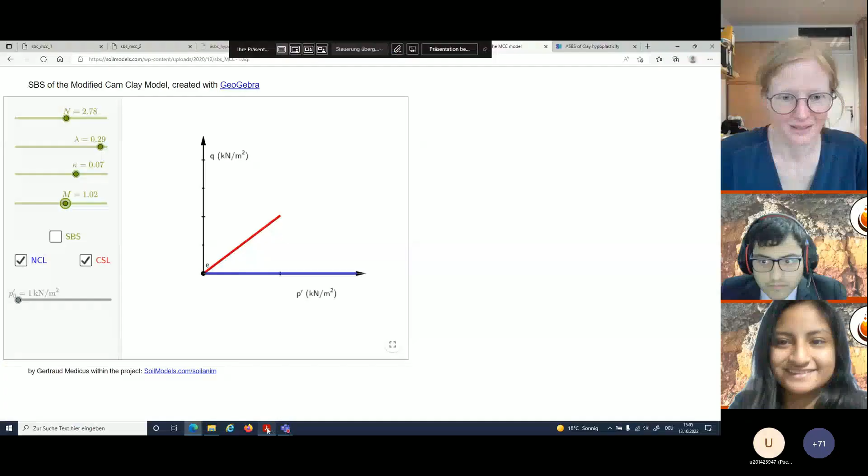Thank you very much for your introduction, and also thank you very much for your invitation. As I said before, it's my first time to be virtually in Peru. I've never been there in person, so it's very nice to start with this visit today.

I will now talk about how visualizations and animations can help to understand soil constitutive modeling. In doing that, I will present a project called Animating Soil Models, which includes a lot of visualizations. Before I start showing the visualizations, I will give a short introduction to the topic.

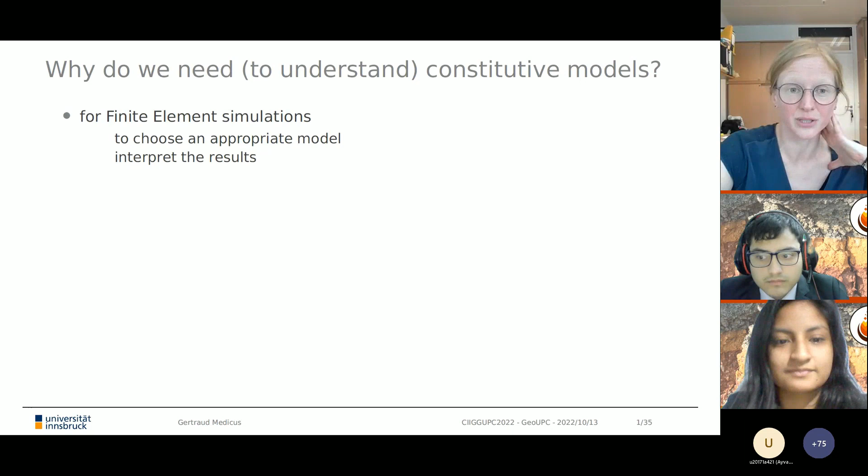Why do we need constitutive models, and why do we need to understand them? Everyone needs a constitutive model if the person carries out a finite element simulation, and we have to choose an appropriate model. We also have to interpret the results, and therefore we have to understand the constitutive model.

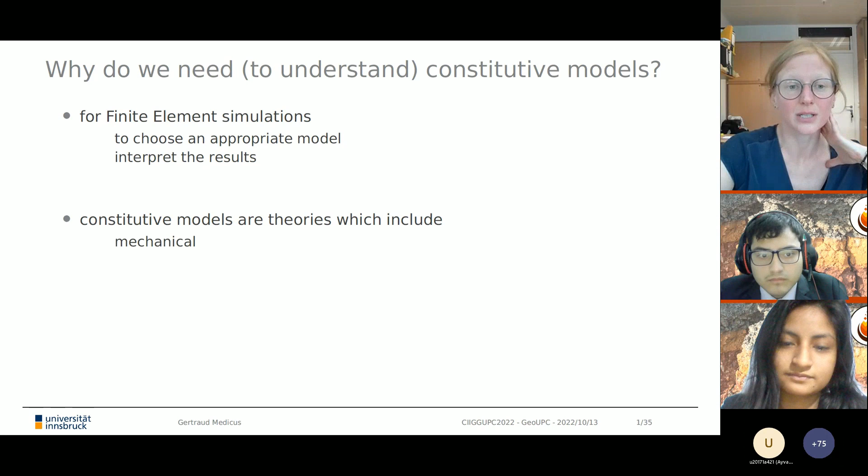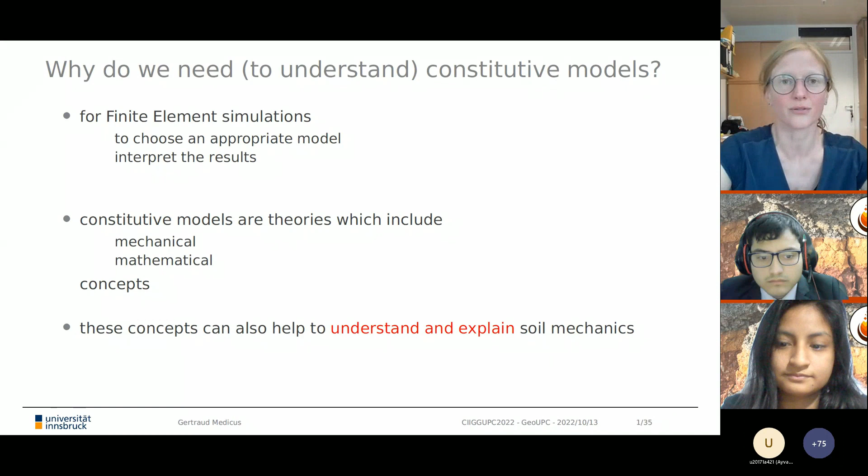In addition, constitutive models include a lot of theories from soil mechanics, including mechanical, soil mechanical, and also mathematical concepts. Understanding these concepts can also help to understand and explain soil mechanics. These models are therefore also frameworks which provide the possibility for further understanding.

There are many different ways how probably every one of you and myself learned constitutive models, and how we teach them. We carry out computations, we need explanations, and we need discussions. There are fantastic books about the topic, videos, and courses at university. And probably there's a lot more.

I will not talk about all that. I will just present one detail on how you can teach or learn constitutive models, but all the above mentioned points are definitely very important. I will talk about visualizations as one possibility to improve the visual aspect of teaching and learning soil constitutive modeling.

Within this project, there are different topics that I visualize. There is quite a large part on failure surfaces. I visualize different models, elastoplastic and hypoplastic models. And in this presentation, I will pick some of those visualizations and make some comments.

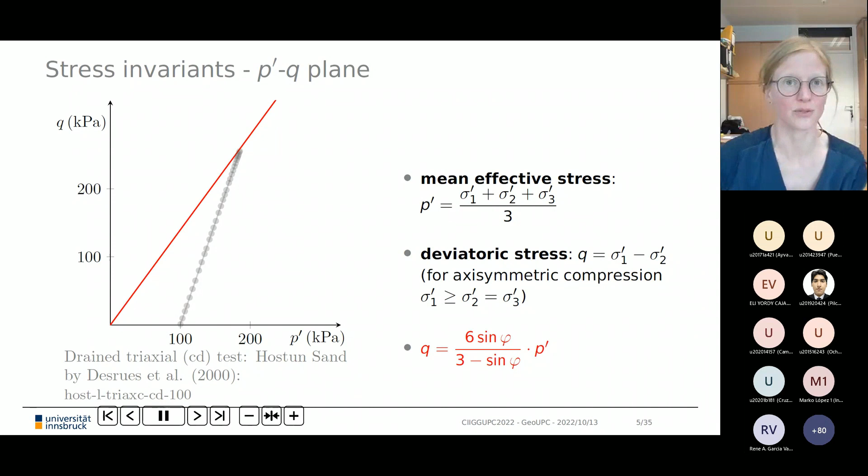We will quite often see this red line in the PQ plane in the following slides. This is, for example, the Mohr-Coulomb failure line for zero cohesion. I will now show a stress path of a drained triaxial test. It starts at a certain consolidation pressure, has a certain inclination, and approaches and finally reaches this failure surface, in this case for a loose sample.

A disadvantage of these animations is that I decide where you have to look, though you can adjust the speed if it's too slow or too quick, at least in the PDF version. But sometimes it would be more convenient if you could choose where to look, so I also created some interactive plots where you can rotate the Mohr-Coulomb hexagon yourself.

You can have a look in the deviatoric plane. I added cohesion to the Mohr-Coulomb hexagon, which results in a shift into the tension regime, and you can also rotate and zoom it. Adding cohesion allows certain tensile stresses, meaning plane stress predictions are possible for cohesive material. Where the transparent part meets the solid part of the hexagon, that's how plane stress predictions look for Mohr-Coulomb failure.

In this plot, I also added a scaled PQ plane for axisymmetric compression to the principal stress space, and you can rotate the whole thing into the PQ plane if you want, to get a feeling for these different planes you can find in literature, the deviatoric plane, PQ plane, and so on.

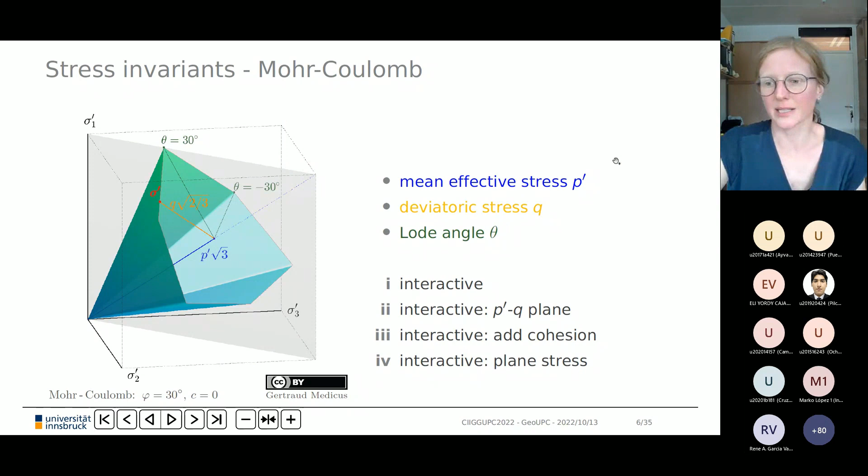Those yield surfaces I just showed, and those on this slide, have been created with an open available software called Asymptote. I learned this software within this project and can highly recommend it for 3D plots. I also uploaded some example scripts on that page because it makes a very nice rendering.

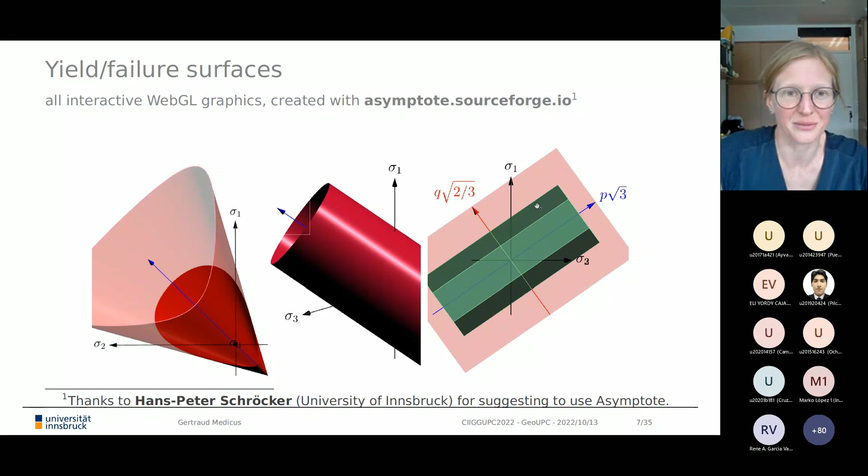You can also find other failure surfaces, like the von Mises failure surface, and have a look at how plane stress predictions look like von Mises in comparison to Mohr-Coulomb, what we saw before.

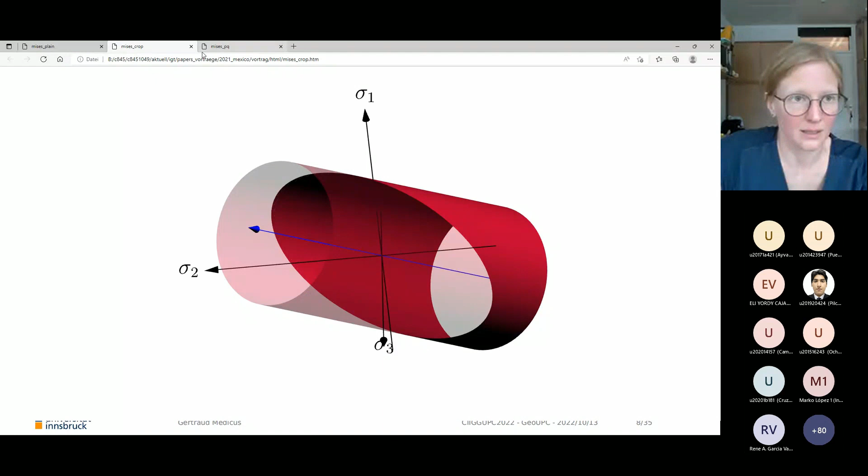I'm going to close that now because I don't need it anymore, and also don't need Mohr-Coulomb anymore. So where did I put... maybe I just close the presentation. I'm just lost. Oh no, here it is.

Another failure surface, also sometimes used for undrained strengths in soil mechanics, is Tresca. Again, you can find interactive graphics where you can have a look at it.

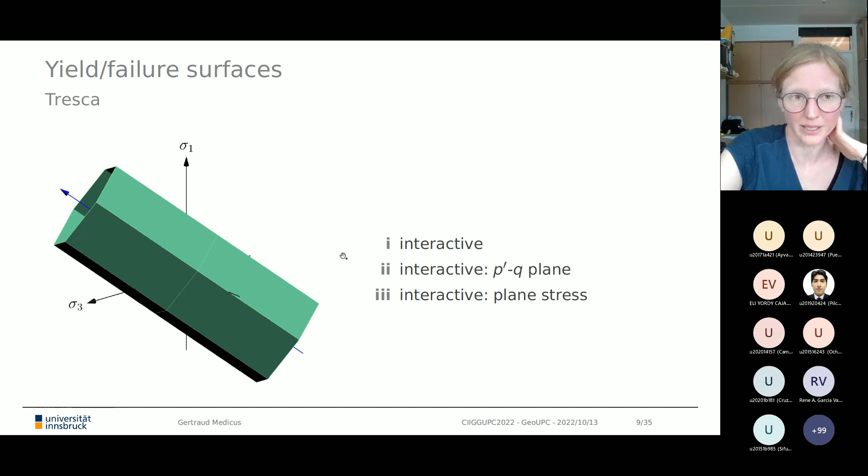There's another surface according to the Drucker-Prager cone. I want to show another interactive plot because it's a bit different to the one I showed before. Before talking about Drucker-Prager, I'll again talk about the principal stress space.

On the left side, you have the principal stress space. On the right side, you can see the deviatoric plane, and the red bullet is your current stress state. You can play with this stress state and choose the state you want, looking at your principal stress state here in the middle. On the right, you can find the corresponding stress invariants: mean effective stress, deviatoric stress, and the Lode angle. You can play a bit with that.

In addition to that, you can add the Drucker-Prager cone here, and decrease or increase its opening. This plot should help to get a feeling for stress invariants, for the deviatoric plane, and also for principal stress space.

Another failure surface, which I'll continue to talk about a bit later and which is included in some constitutive models like clay and sand hypoplasticity, is Matsuoka-Nakai. It doesn't look like Mohr-Coulomb because it's more round, but it also doesn't have a circular shape in the deviatoric plane—it's not a circle, so it's different to Drucker-Prager, what we saw before.

We can again have a look at Matsuoka-Nakai: how does that look in the deviatoric plane, and how do, for example, plane stress predictions look in the case of Drucker-Prager, and so on.

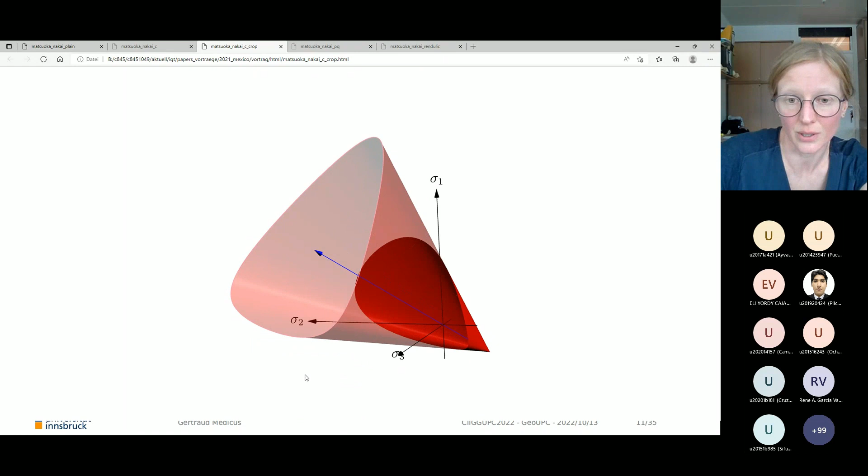What we can see here is, at least for zero cohesion, the predictions coincide for axisymmetric extension and axisymmetric compression. But in between, for the same parameters, strength predictions are a bit higher for Matsuoka-Nakai than for Mohr-Coulomb, and the difference is highest, around 15-16%.

This occurs somewhere between compression and extension, in the range of Lode angles between 0 and 15 degrees, where plane strain failure is reported to occur. That's a range which is definitely relevant in finite element simulations, because we often model or idealize a problem under plane strain conditions.

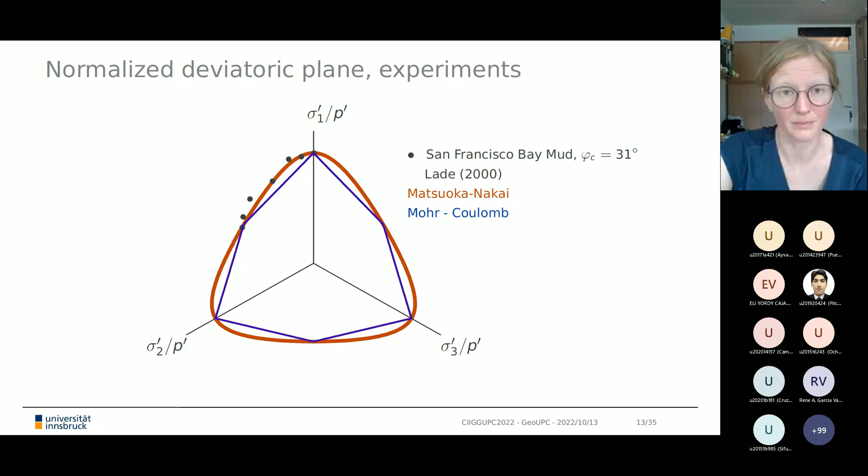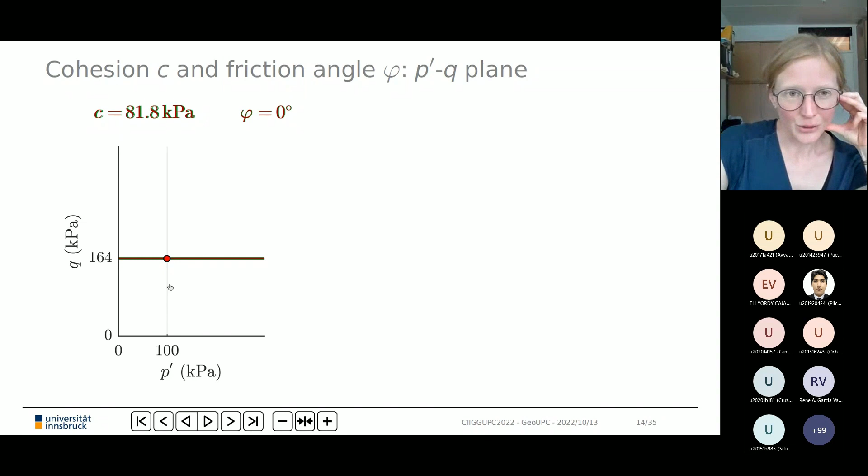At 100 kilopascal, I will now continue the same, but I added the deviatoric planes and do exactly the same. I keep 100 kilopascal, the axisymmetric stress state, fixed in all three plots. In the middle, I show Matsuoka-Nakai for a mean effective stress of 100 kilopascal, and on the right, Mohr-Coulomb for a mean effective stress of 100 kilopascal. Then I again change parameters and we will see what happens.

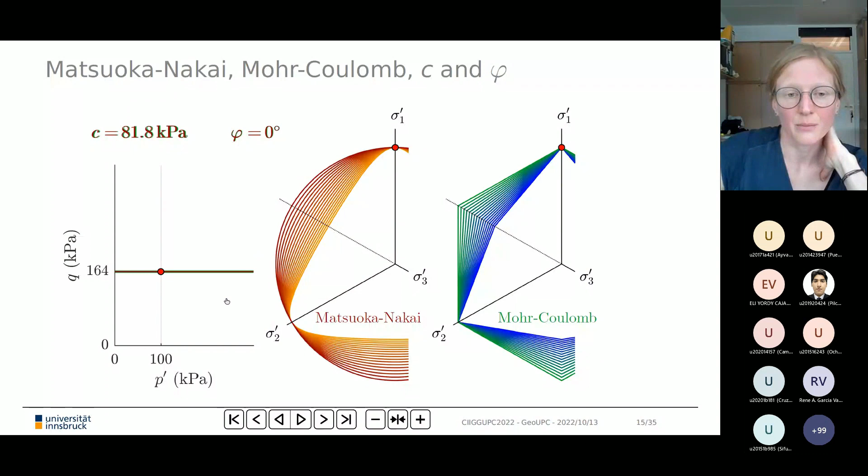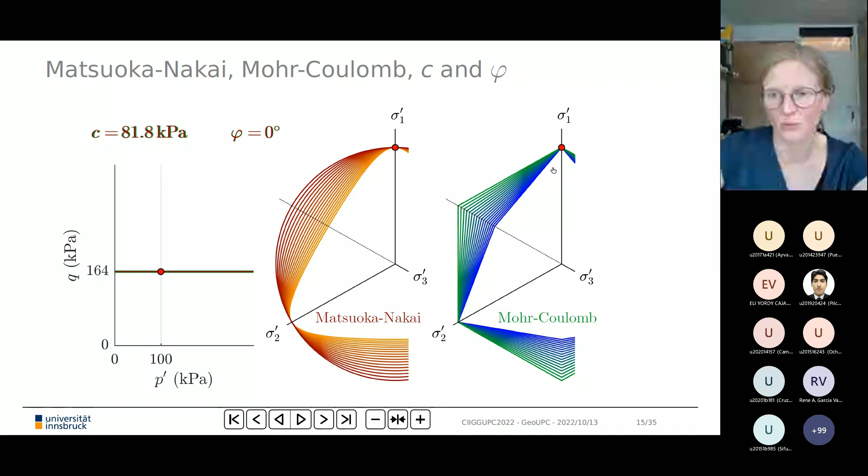It's interesting to see that even though we keep the axisymmetric stress state fixed, by changing the parameters, strength prediction of every other deviatoric direction changes. Eventually, for zero friction and a certain value of cohesion, Matsuoka-Nakai will turn into the cylindric shape we saw before, and Mohr-Coulomb will eventually become, for zero friction, Tresca. So we have to keep in mind that changing friction angle and adding cohesion will change the shape of a failure surface in the deviatoric plane, even though for a certain stress state for axisymmetric compression, there's no change in strength predictions.

So far, I haven't talked about models, just about failure surfaces, and I will again show what I showed on the first slides. Above left, I show the PQ plane with, let's say, a Mohr-Coulomb failure line for zero cohesion and a stress path for an initially loose Hostun sand sample. I show predictions with a linear elastic, perfectly plastic model with a failure surface according to Mohr-Coulomb. We see the predictions have a certain stiffness at the beginning and then zero stiffness when the Mohr-Coulomb failure line is reached.

If I increase the stress level, we can see that strength increases proportional to the stress level. But we can also see that the stiffness in this model is not increased compared with the lower mean effective stress. We can basically see what we saw before: by further increasing the stress level, strength is increased, but stiffness is kept the same.

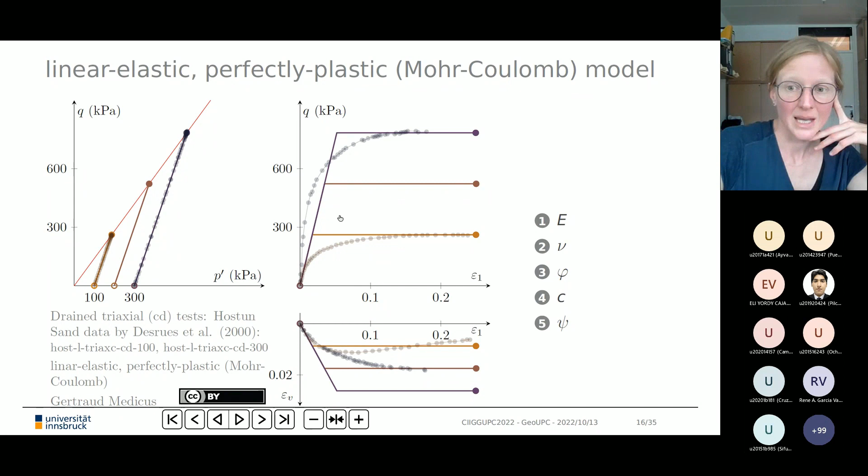There are some variations also on the website where Poisson ratio is varied, and I show one. I will now show one on this slide. I again choose the initially loose sample and show predictions with a Poisson ratio of 0.05. I increase the Poisson ratio and we can see that in this case, only the volumetric response is affected and not the deviatoric stress-axial strain curve.

For other tests, such as an oedometric compression test where lateral expansion is hindered, or also a plane strain biaxial test where one direction is hindered, the Poisson ratio also affects the stress path and not only the volumetric response.

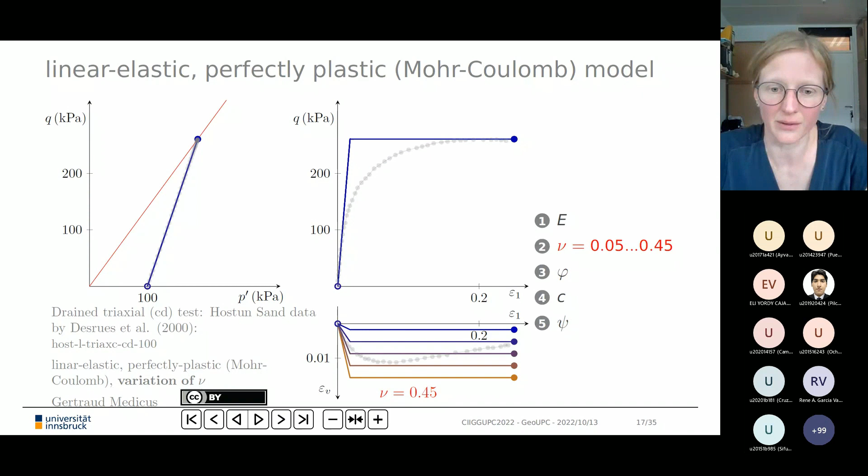I will now talk about models that are related to critical state soil mechanics. That is, in this presentation, the modified Cam-Clay model and clay hypoplasticity. Again, on the left side, we can see the PQ plane. We can see a critical state line in the stress plane, and there is some bounding line. I will talk about that a bit later.

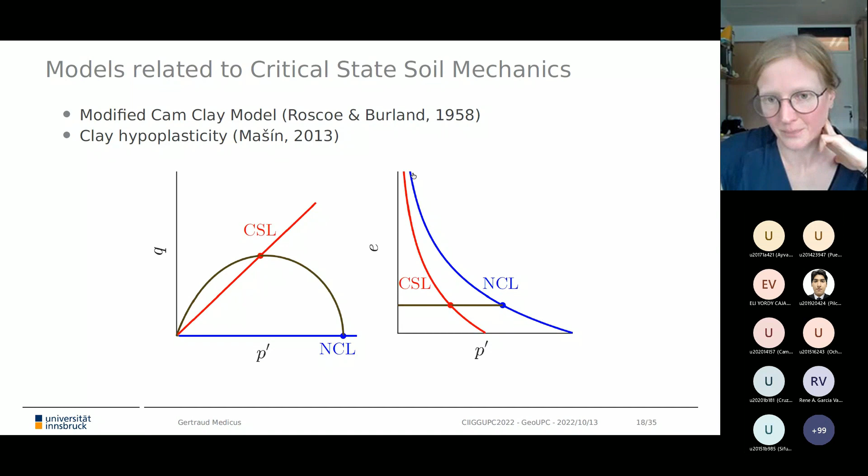What is important in critical state soil mechanics is that there is a critical state line not only in the PQ plane, but also in the void ratio-mean effective stress plane. It's the red line here on the right side. There is also a normal compression line which characterizes normally consolidated states of clay. The critical state line in void ratio-mean effective stress plane helps to distinguish between normally to slightly over-consolidated soil.

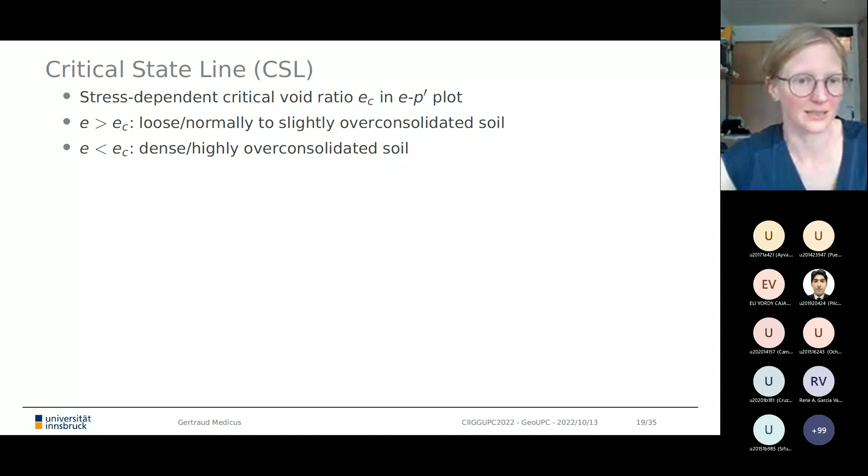And we can see that these endpoints of undrained tests can be well described or fitted by a line, and that is the critical state line. If we plot this line in a logarithmic plot, we can see that all those data points lie on a straight line, and that's the critical state line, often assumed to be parallel to the normal compression line in critical state soil mechanics.

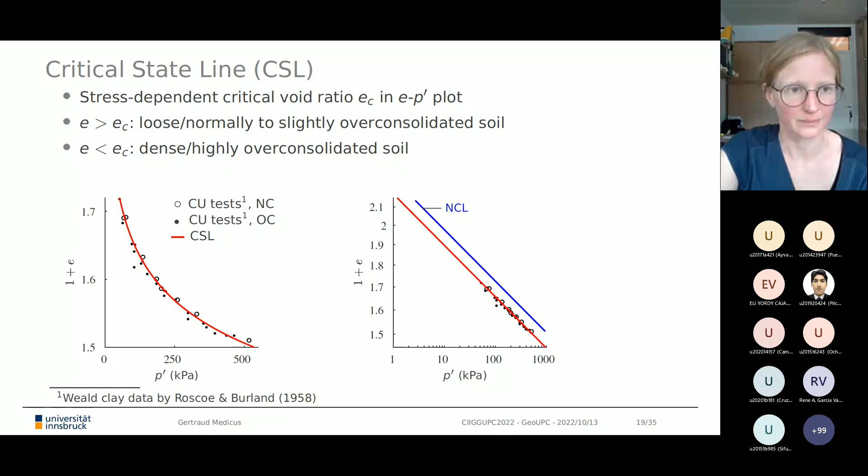I will now show some animations of an elastoplastic model, the modified Cam-Clay model, and I will start with a simulation of an initially normally consolidated drained triaxial test.

As I said before, the sample is initially normally consolidated. That means that the initial state is on a normal compression line. And for the yield surface, that means that my maximum pre-consolidation pressure coincides with my current initial mean effective stress.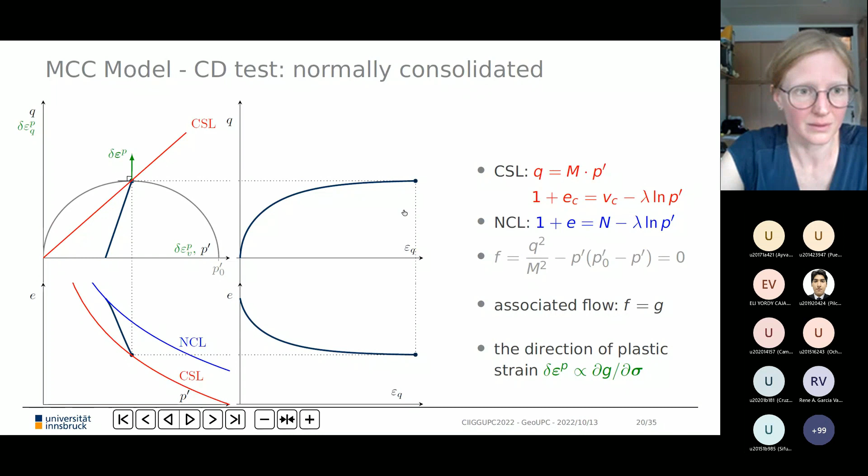I will now show again a simulation of a drained triaxial test with a modified Cam-Clay model, but this time of an initially highly overconsolidated state. Highly overconsolidated means that the pre-consolidation pressure of this clay has been a lot larger than the current initial stress state. The current initial stress state is, in the p-q plane, this blue or black bullet.

The preconsolidation pressure defines the size of the yield locus, and we can see that it is now a lot larger than it was before for the normally consolidated sample. Highly overconsolidated initial state also means that the current void ratio is smaller than the critical void ratio, and that means it lies below the critical state line.

We will now just look at what will happen if we start the simulation. The stress path is now within the yield surface, which means that the initial response is elastic.

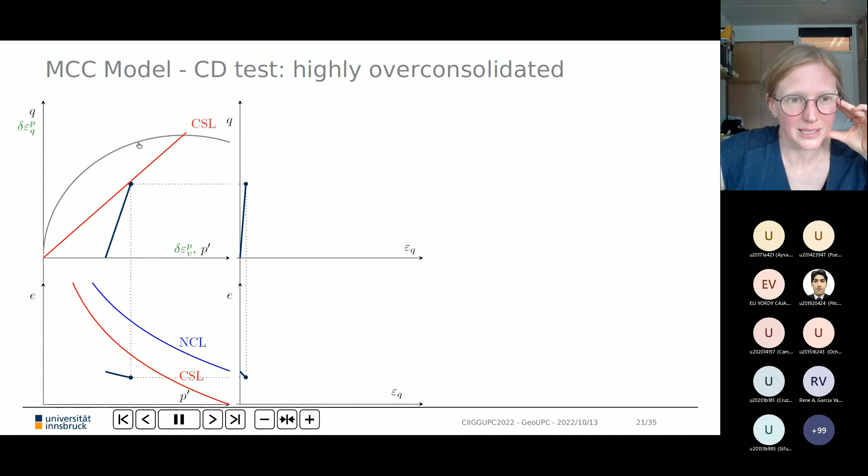As the sample is highly overconsolidated, we can this time exceed the critical state line until we reach the yield locus. And then we can see that softening occurs.

What we can see in the void ratio-mean effective stress plane is that we had compaction at the beginning, but now the sample has to dilate in order to reach critical state.

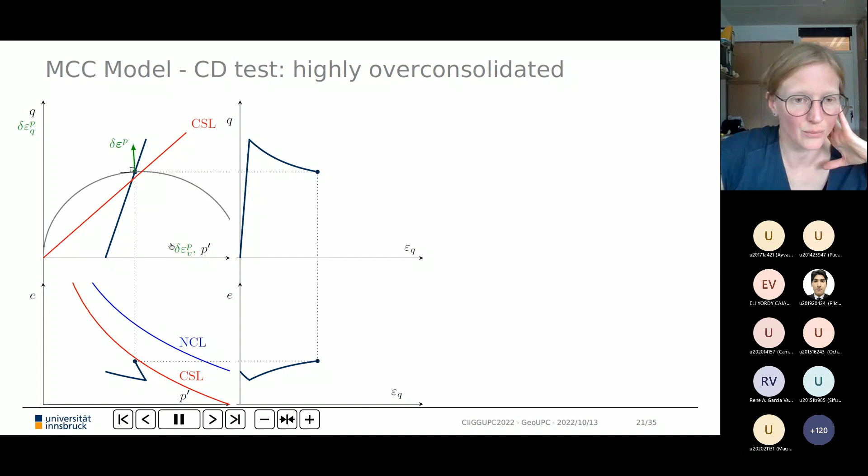And we can see in the deviatoric strain curve the softening behavior until we reach the critical state line. We can again see dilative behavior, and we can see that approaching critical state, the ratio of the volumetric strain increment to the deviatoric strain increment reduces. Finally, we just have ongoing distortional strain and no change in volume.

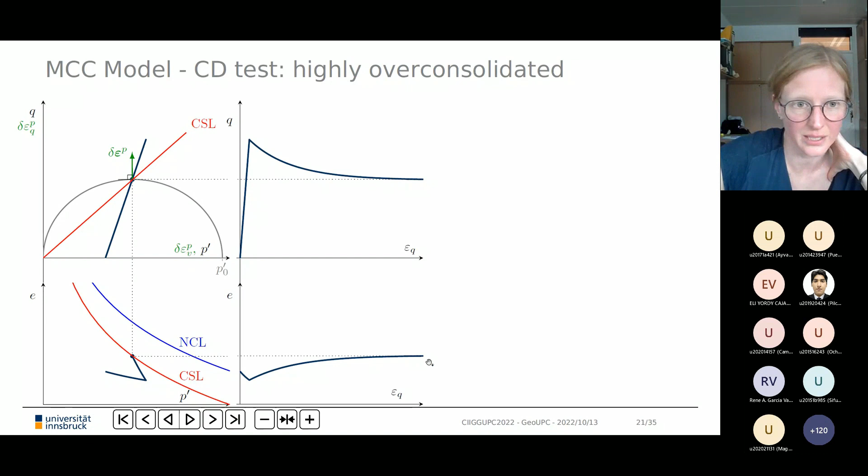I will continue with undrained compression tests of, again, a normally consolidated sample. I again show the same plots, I just added another line. The dotted line above left indicates the total stress path. And I exchanged the volumetric response with a pore pressure development, because the volume in an undrained compression test stays constant, and therefore it wouldn't be interesting.

We can see, oh, we have to wait a bit.

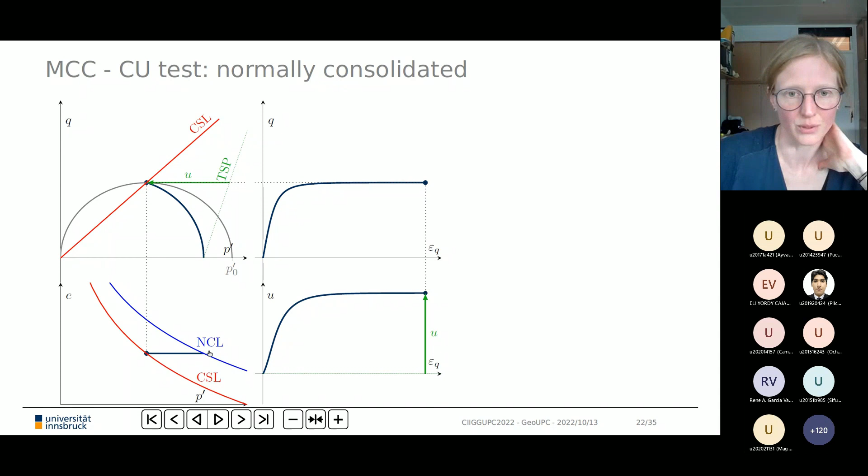The difference between the current stress state and the total stress path defines the pore pressure. For the initially normally consolidated state, pore pressure increases until we reach critical state. We see the typical stress path for normally consolidated clay that goes to the left, and a stress-strain behavior similar to the drained triaxial test. Again we reach critical state, with no more change in pore pressure. We have reached critical state in the void ratio mean effective stress plane and in the PQ plane, and the volume was kept constant throughout the whole simulation.

I will now show a simulation of an undrained test, this time not of highly overconsolidated clay, but just slightly overconsolidated clay. That means the initial state in the void ratio mean effective stress plane is just in between the normal compression line and the critical state line.

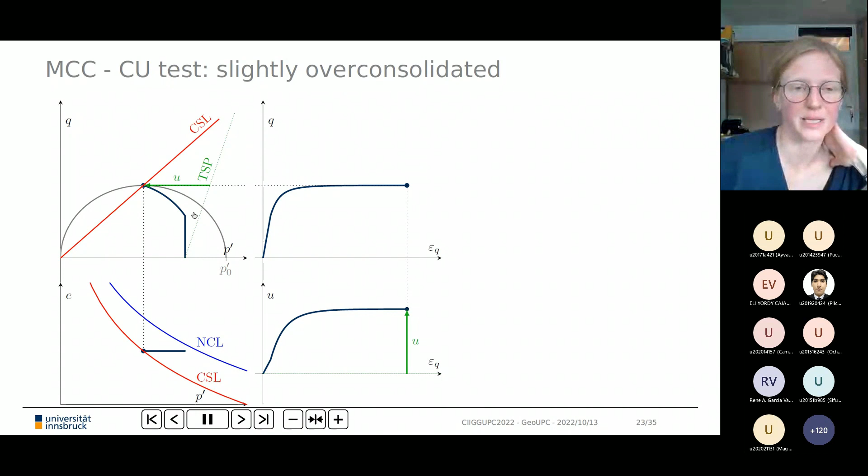We therefore have a bit of an elastic response until we reach the yield locus, and again we have an increase in pore pressure. Elastic response means that within the model, the mean effective stress stays constant in the elastic regime. Then we see a response very similar to what we saw for the normally consolidated clay, except for the very beginning until the yield surface is reached.

A bit different now: an undrained triaxial test of highly overconsolidated clay. This time, in the initial elastic response, we can see that the mean effective stress in the elastic regime stays constant.

Then when we reach the yield surface, we can see that the yield locus shrinks, and we have a decrease in pore pressure. When we reach critical state, there's no more change in pore pressure. The critical state line is reached in the PQ plane and in the void ratio mean effective stress plane. Due to the shrinking of the yield locus when yielding, that explains the different stress-strain curve in the Q epsilon Q plot.

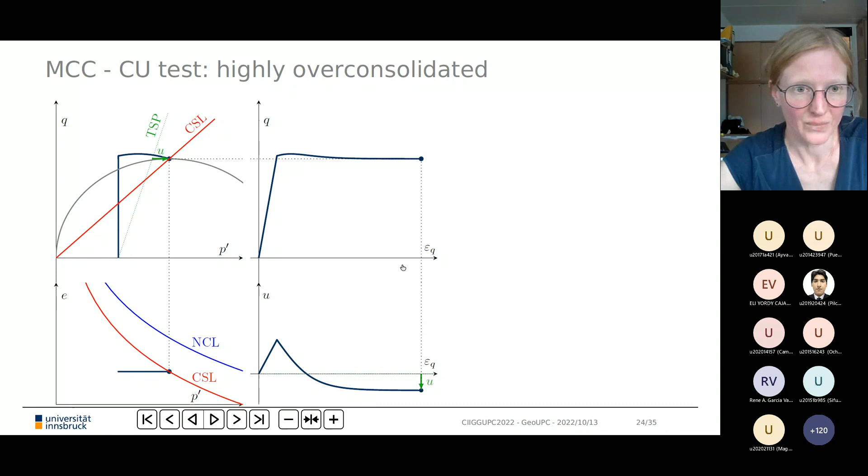The parameters you need to calibrate the modified Cam Clay model are: the friction angle to define the slope of the critical state line, sometimes called M; the ordinate intercept of the normal compression line; the slope of the normal compression line, which is also the slope of the critical state line; the slope of an unloading line; and the shear stiffness.

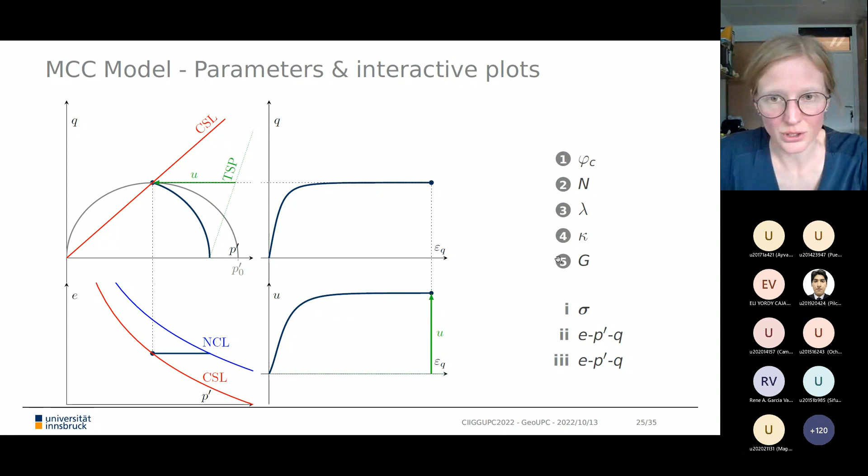I will now show some interactive plots related to the modified Cam Clay model. You have seen this a couple of times now. It's the PQ plane. The blue line is the hydrostatic axis or the normal compression line, and the red line is the critical state line. Here I show all parameters of the modified Cam Clay model, and you can play with those parameters and see what happens. If you increase friction, you have a different slope, which affects the critical state line in the projection in the PQ plane. All the other parameters don't change anything in this plot.

But you can rotate this plot. It's a three-dimensional plot, and you can also look at the void ratio mean effective stress projection and see how the parameters affect this projection. The critical friction angle, or M, doesn't change anything, but the slope of the unloading line slightly changes the critical state line. The slope in the semi-logarithmic plot of the normal compression line and critical state line changes both lines, and the ordinate intercept also changes both. I think this plot helps to understand that those two lines are three-dimensional lines, and it's sometimes very convenient to rotate into the projections you're interested in.

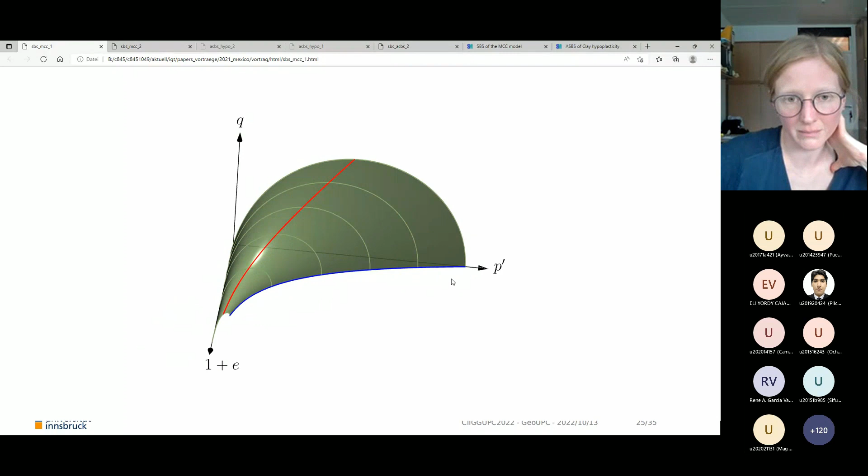The rendering isn't as nice as with the asymptote program software, but what is very convenient with this software is that you can easily create sliders. I can highly recommend this software. Here is basically the same, but you cannot change the parameters, but you can look at the different projections.

In the void ratio mean effective stress plane and so on, for the simulations of the modified cam clay model, I just talked about axisymmetric states, but here I show the state boundary surface in a principal stress space with a deviator. There are different possibilities, but this one has a circular shape in the deviatoric plane, and you can look at this ellipsoid, how it looks in principal stress state as well.

I will now talk a bit about a different model called clay hypoplasticity. The math between this hypoplastic model and the modified cam clay model, the equations differ quite a lot. But the concepts behind are very familiar, because you can see them already.

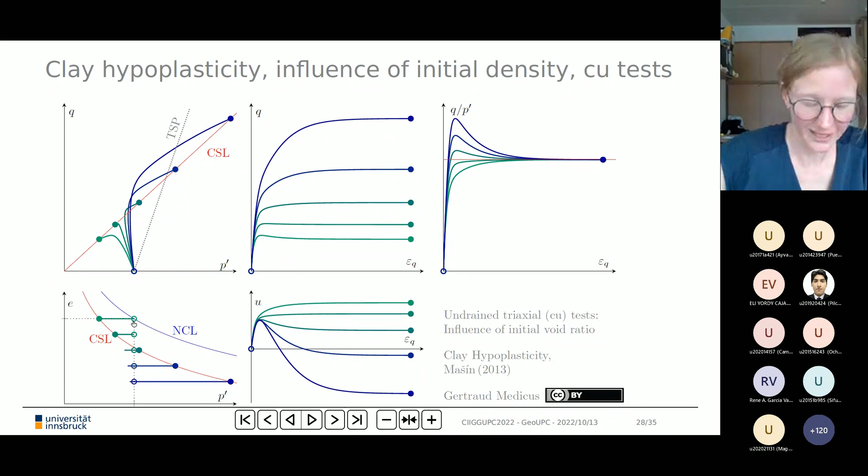Again, I will show simulations of undrained triaxial tests, and this time I will keep the mean effective stress constant but change the void ratio. This results in the fact that, as we saw before, undrained strength is highly affected because we changed the initial void ratio.

This time we will not change the initial void ratio, only the mean effective stress, and we will see that critical strength is not affected if we change the overconsolidation ratio. Just the stress path is affected, and pore pressure development, and also the maximum possible stress ratio.

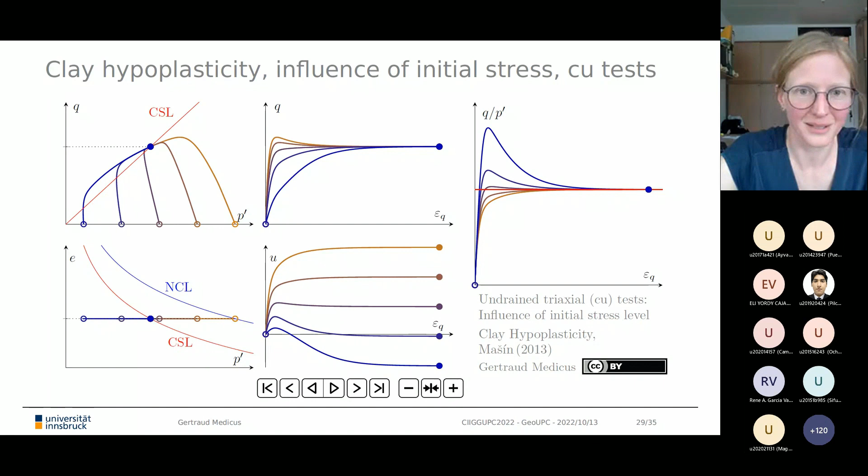The parameters of clay hypoplasticity are very similar to the modified cam clay model. There are some details, but again we have the slope, the ordinate intercept of the normal compression line, the slope of the normal compression line, the slope of an unloading line, a critical friction angle, and a fifth value that affects the volumetric response, or also the shape of the stress path.

Why did I use lambda for the modified Cam Clay model, or not? It was not my idea, you always see lambda and kappa. For clay hypoplasticity, you sometimes see lambda star and kappa star. That is related to the definition of the normal compression line and critical state line.

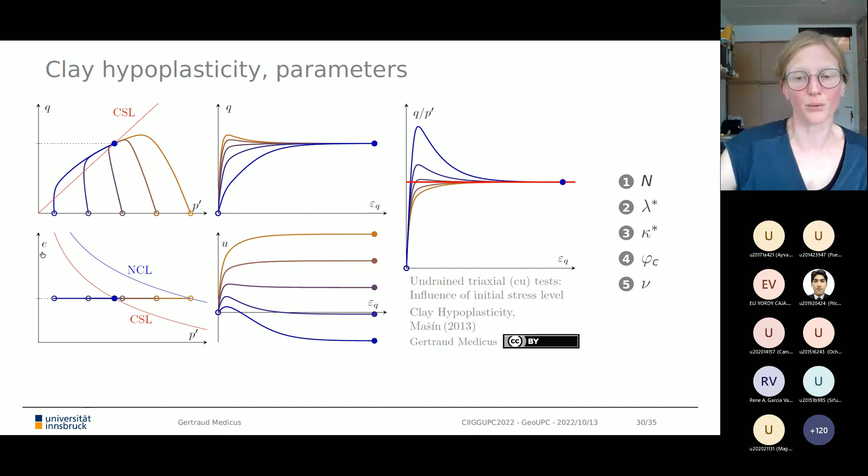In the modified Cam Clay model, the definition is in a semi-logarithmic plot. In the hypoplastic model, or at least for those where you see the star, the normal compression line and critical state line become straight lines if plotted in a double logarithmic plot, with mean effective stress and 1 plus void ratio both plotted logarithmically. Just a small difference.

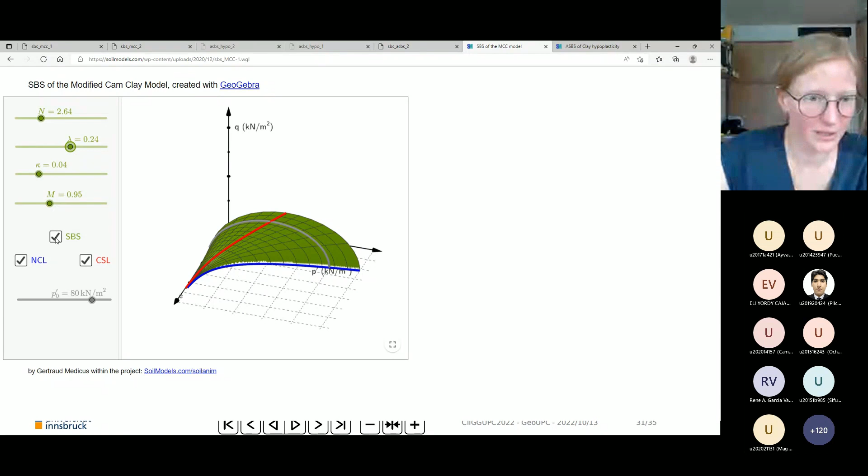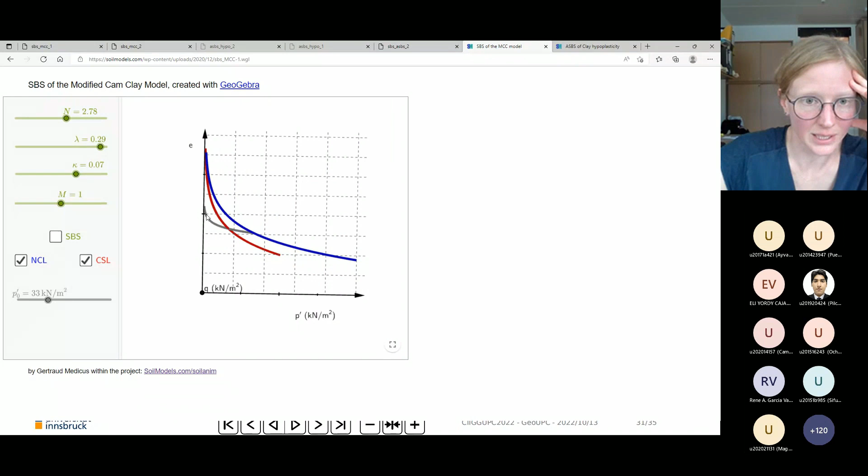This looks very similar to what I showed before. It's the state boundary surface of the modified Cam Clay model. I have to probably reload it so we can address some differences. We can see here an unloading line of the modified Cam Clay model, same as before, and for clay hypoplasticity I basically have the same plot.

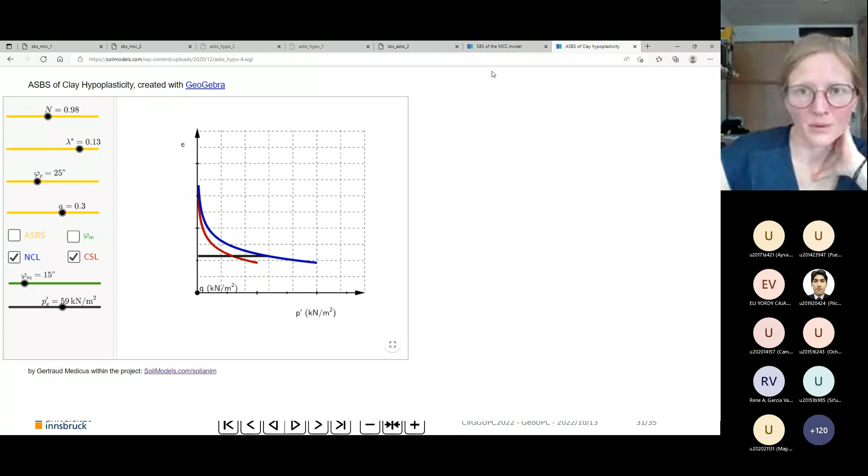But we can see it better if we plot it differently. The shape is a bit different than for the modified Cam Clay model. But basically, yeah, you can see the bounding surface better here.

In the PQ plane, in the modified Cam Clay model, this bounding surface has a strictly elliptic shape. In this case it looks very similar but it's a bit different, and there is a parameter where you can adjust peak states. So this is not strictly elliptic, you can change that if you're interested.

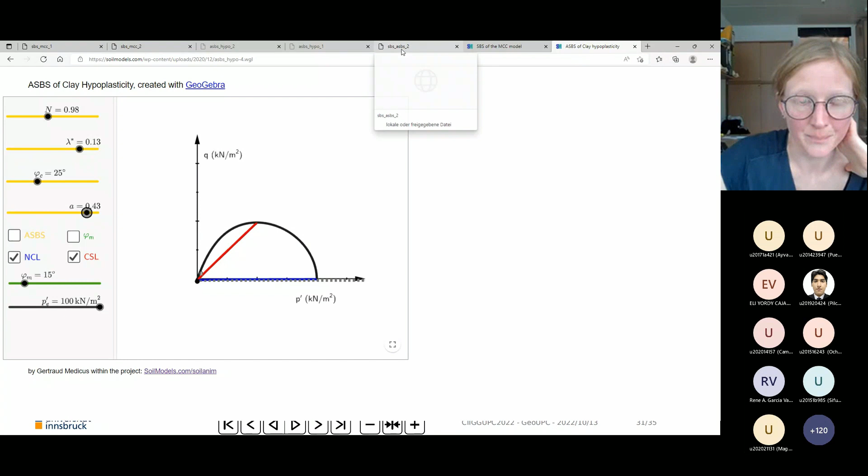In the principal stress space, I have not uploaded this plot because I'm not completely satisfied, but what we can see here is the transparent surface related to the modified Cam Clay model, and the yellow surface related to clay hypoplasticity. We can see differences in the deviatoric plane.

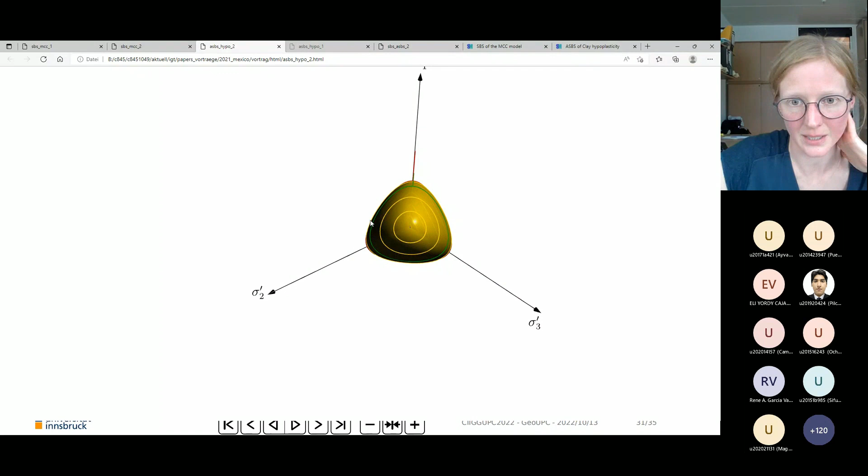It has a circular shape for the modified Cam Clay model, and clay hypoplasticity includes Matsuoka Nakai in the deviatoric plane. You can see that very well if it's overlapped, but also if you look individually at those figures. The clay hypoplastic model includes Matsuoka Nakai and the modified Cam Clay includes a circular shape, and it also allows certain tensile stresses.

And in clay hypoplasticity, admissible states are only restricted to the compression regime. That's another difference between the models.

I will continue to talk a bit about the project, and we'll also show the website.

There are these 3D graphics that can be included in web pages. The animations I showed, you can simply download as GIF animations, or you can also download them as PDF animations. The PDF animations have an advantage in that you can take a break and adjust the speed.

If you're not interested in the animations, you can just download all slides of an animation as PDF, and just include one slide in a presentation if you want.

Where to find all that? There is a platform I highly recommend, not because of my project but because of this platform. It's called Soil Models, and probably many of you know that platform. I'm going to close a bit of the rest in order to increase speed a bit.

There is a platform, Soil Models, and on this platform you can download different software. There is simulation software. You can make simulations using hypoplasticity, simulations of drained and undrained compression tests yourself, and you can vary the parameters.

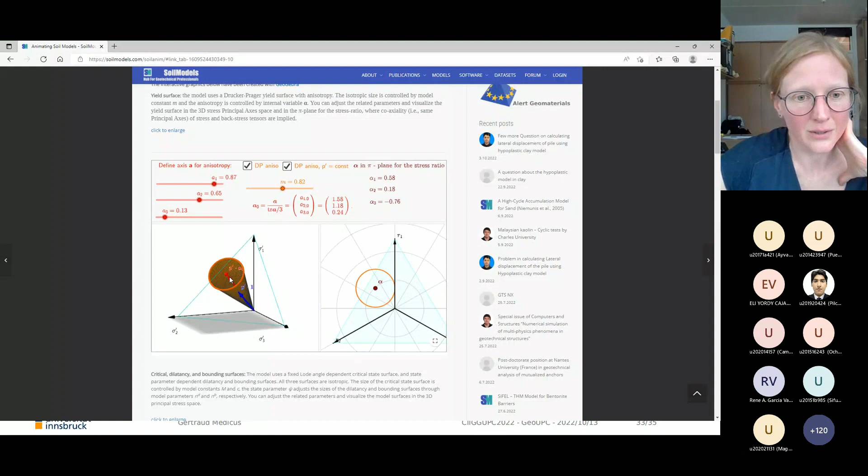What I wanted to show, which I haven't talked about, is a cooperation with Mahdi Taiebat from Canada, where we did some visualizations of SANISAND plasticity. In this case, you can see a Drucker Prager model.

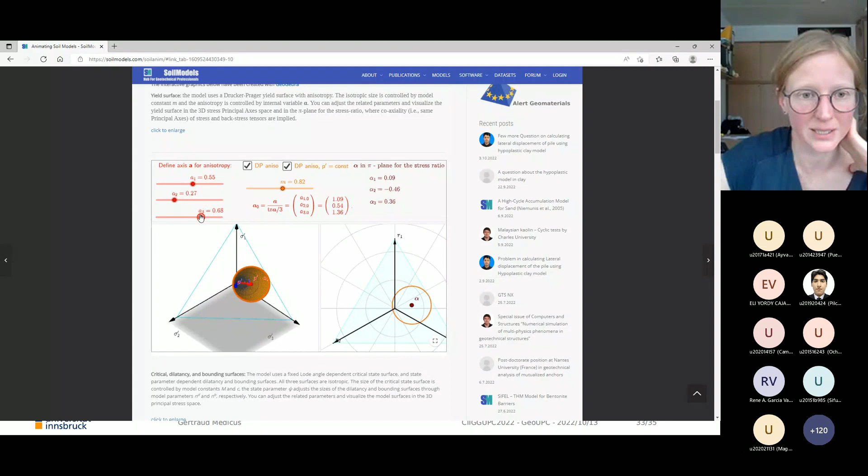This one is anisotropic. I only talked about isotropic Drucker Prager before. If you have an anisotropic cone, you need to define an axis in principal stress space. To understand the model, it can help to play with all those values.

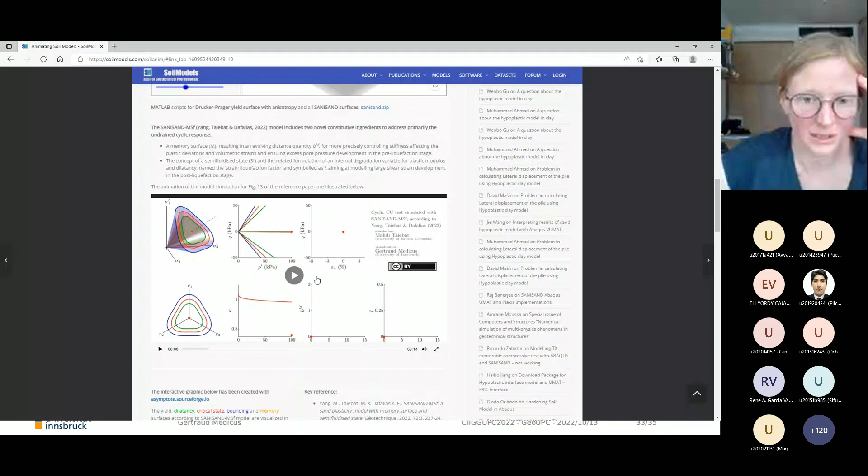You will also find a short video related to SANISAND plasticity, where you can play with the parameters that affect the shape of the surfaces included in SANISAND plasticity.

What else is there to find? I also uploaded some MATLAB scripts to calculate and plot different yield surfaces, for example for Matsuoka-Nakai, Mohr-Coulomb, Drucker Prager, and also for the state boundary surface of the hypoplastic model. I tried to add comments to the scripts so they should be easy to follow, and you can just try them out and download them.

What is the benefit of all that? I like to do it, I like to create visualizations related to constitutive modeling, but I also hope there is a benefit for others as well, and that it can help students.

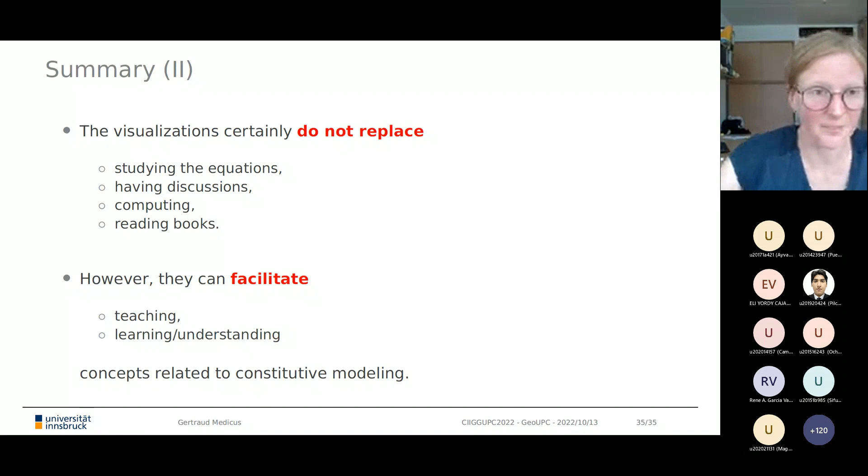I'm finished with my presentation, but before I'm available for discussion, I want to mention that in this handout I also added some further examples related to this, which have not been done by myself, but there are so many other useful examples.

That can help with understanding and teaching constitutive modeling. If you look at the handout, you can see the Soil Models webpage in general, the calibration tool, and there's a YouTube channel I can highly recommend, along with other interactive visualizations done by others that are hopefully very helpful for you as well.

Yeah, I'm open for discussion. If somebody has questions, I will be happy, or at least try to answer them, and I will be happy about that. Thank you for your attention.